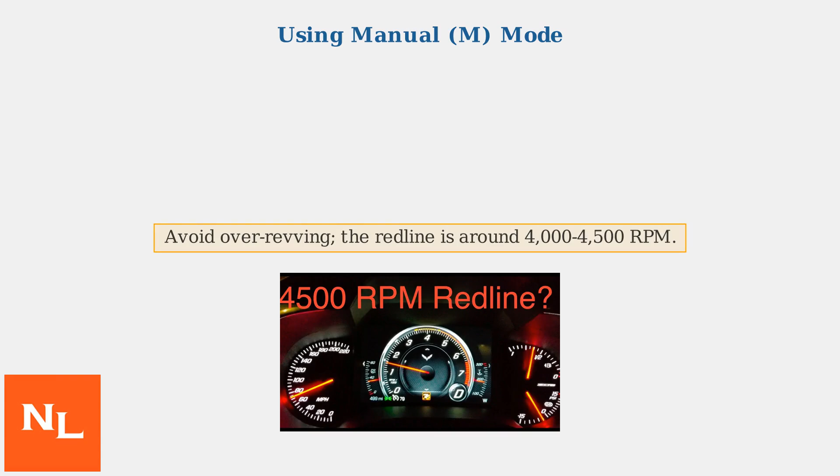When going downhill, downshift to lower gears to use engine braking, which helps slow the vehicle without wearing out the brakes. Be careful not to over-rev the engine. The red line is approximately 4,000 to 4,500 RPM. Avoid exceeding this to prevent damage. Use manual mode sparingly to minimize wear on the clutch packs and extend transmission life. When using paddle shifters, you may notice a slight improvement in acceleration due to quicker gear changes.

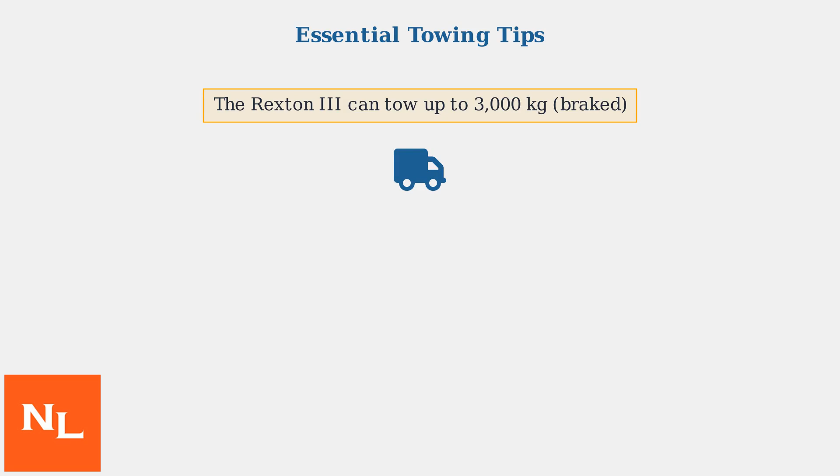The Rexton III can tow up to 3,000 kilograms when braked. This mid-size SUV handles trailers well with its diesel engine and automatic transmission. For towing, set the gear selector to D for automatic mode. This allows the transmission to shift gears smoothly based on speed and load. When towing heavy loads, manually select gear 2 or 3 to reduce strain on the transmission. This limits frequent shifting and helps maintain control.

Safety is crucial when towing. Always use the original equipment manufacturer tow bar, and make sure the trailer is equipped with electric brakes for reliable stopping power. Monitor the transmission temperature on your dashboard display. Keep it below 100 degrees Celsius to prevent overheating and potential damage during towing.

When descending hills while towing, use manual mode to engage engine braking. This helps control speed and reduces wear on your brakes. Select a lower gear, such as 2 or 3, to maintain a safe speed without excessive brake use. This is crucial for preventing overheating of both brakes and the transmission.

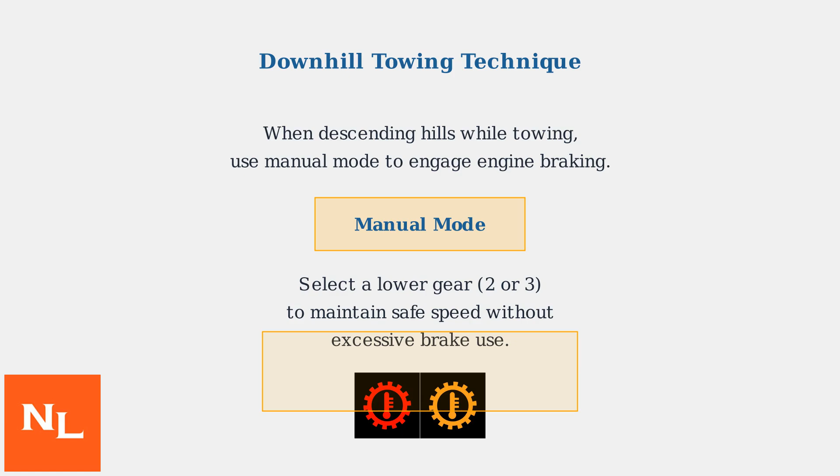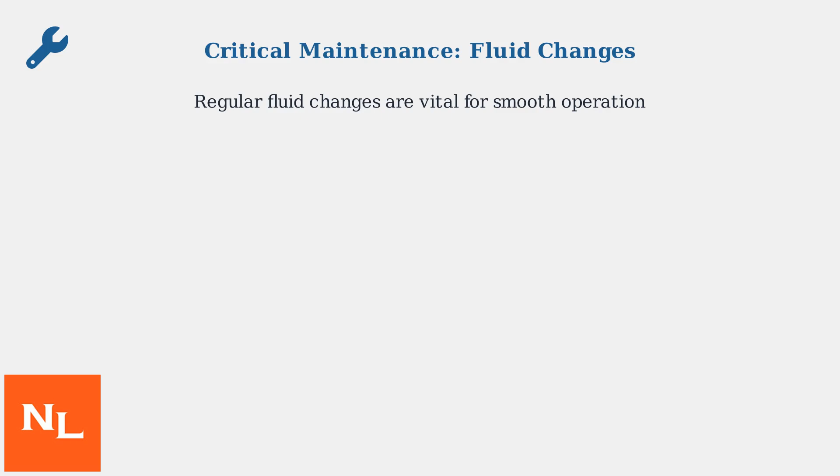Critical maintenance for the SsangYong Korando III automatic transmission focuses on fluid changes. Regular fluid changes are essential to maintain smooth operation and prevent damage. Use ATF Dexron 6 or equivalent transmission fluid. This high-quality fluid ensures proper lubrication and cooling of the transmission components. Change the transmission fluid every 50,000 kilometers. This regular maintenance prevents overheating and extends the life of the gearbox.

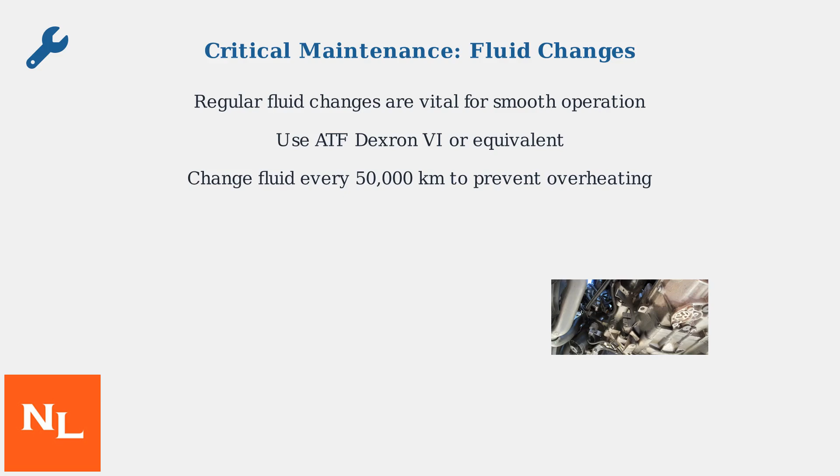During service intervals, inspect for fluid leaks and replace transmission filters. This helps maintain clean fluid flow and catches potential issues early. Avoid prolonged stop-start traffic whenever possible. This reduces heat buildup in the transmission, especially important since base models lack a dedicated transmission cooler.

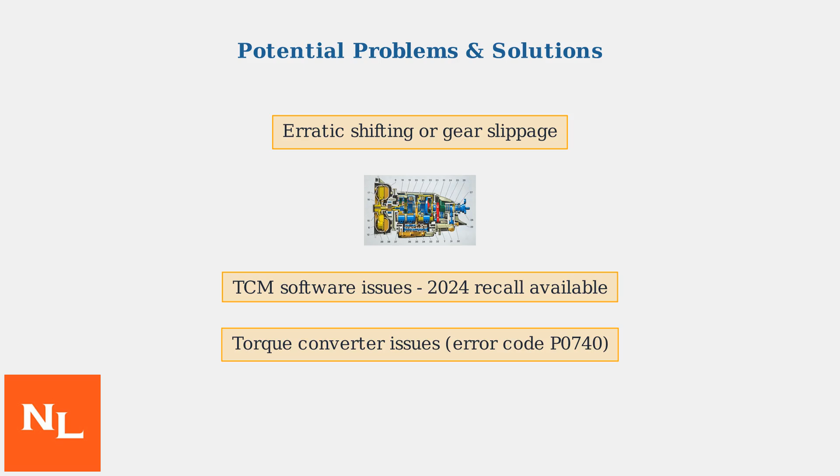Be aware of potential issues like erratic shifting or gear slippage that can occur in the Korando III's automatic transmission. A 2024 recall addressed transmission control module software problems. Ensure your vehicle has received this free update to prevent gear hunting and slippage. Torque converter issues, indicated by error code P0740, can cause slipping and reduced performance.

OBD2 scanners help monitor transmission fluid levels and diagnose error codes in real time. If problems persist, aftermarket remanufactured transmission units are available for replacement. Regular monitoring and timely updates can help maintain your transmission's reliability.

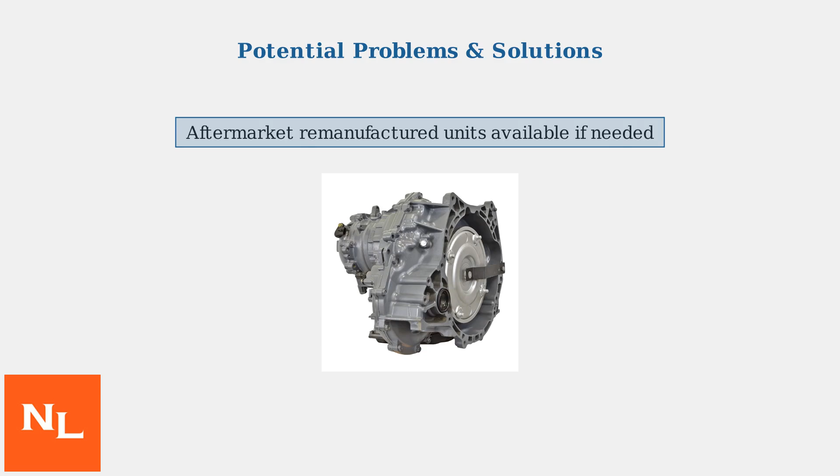To maximize the lifespan of your Korando III's automatic gearbox, focus on driving habits and maintenance. Aggressive acceleration or frequent heavy towing without modifications can cause excessive wear on components like solenoids and torque converters. Always avoid sudden throttle inputs and consider modifications for towing.

Transmission temperature is critical for longevity. Monitor it regularly, especially during towing, as overheating can lead to fluid breakdown and component failure. Use gauges to stay below 100 degrees Celsius and install cooling systems for heavy loads.

Regular maintenance is essential for gearbox health. Change transmission fluid every 50,000 kilometers using ATF Dexron VI. Inspect for leaks and replace filters during services. This prevents wear and ensures smooth operation. Address any issues promptly through diagnostics using OBD2 scanners to check for error codes. For frequent heavy towing, consider upgrades like remanufactured units or retrofit kits to improve reliability and efficiency.